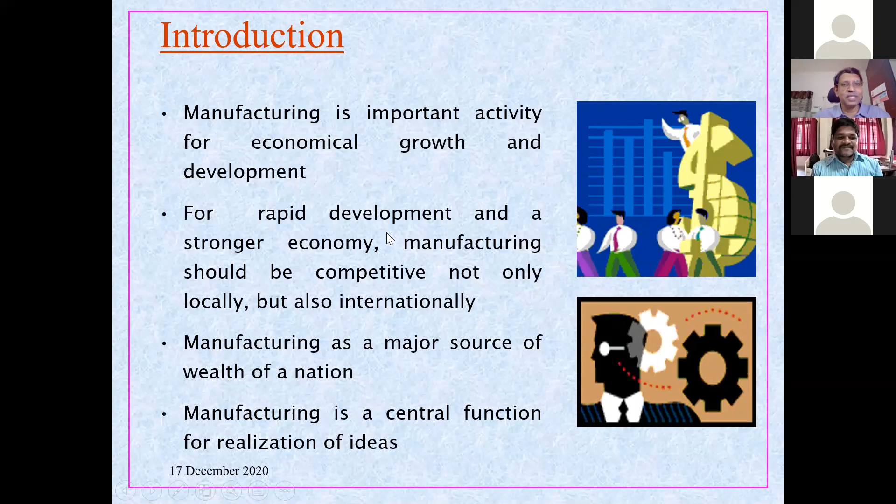First thing we need to understand is manufacturing is a very important activity for the economic growth of any country. These days, manufacturing stands as the backbone for the economy and stability of a country. A few years back it was agriculture and other trades, but now it is basically manufacturing. If any country has advanced manufacturing technologies, we know that it is a developed country. So that is how manufacturing is associated with the development of a country.

If you look at the definition of manufacturing, and if you look at what we are today, both actually don't really match. Manufacturing is a word derived from Latin, a combination of the words manus and factus. Manus means hand, factus means to make. So the meaning of the whole word is manufacturing means making with hand, or made by hand. That was the definition.

But today, if you look at manufacturing, I'm going to show you some videos which will bring to you the practical scenario in industry today, where everything is manufactured without the intervention of human hand or human being. So manufacturing, though it means something, the present scenario is entirely different. We are going to look at what made this kind of transformation, right from just making with hand to the present state of manufacturing that we have.

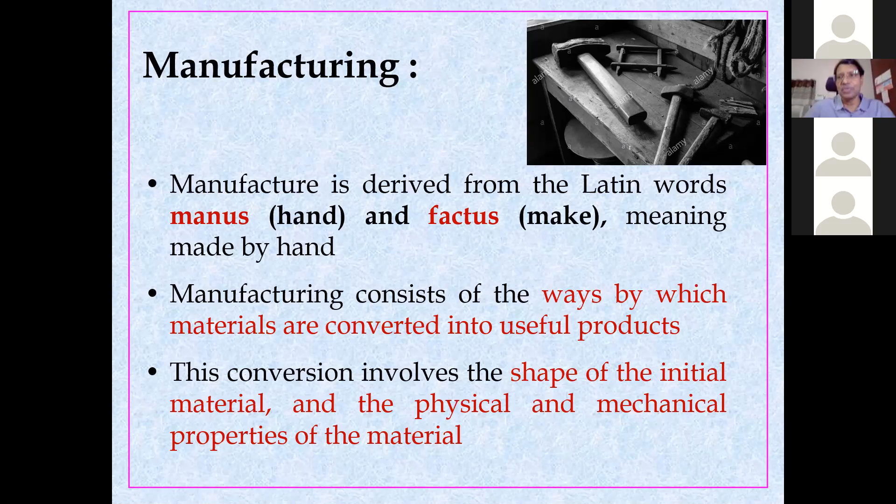As all of you know, manufacturing is a process, a value addition process where it transforms raw material into a useful product, by applying several technologies. That is the definition of manufacturing.

Now, if we go back and look, we may be thinking that we, at our present age, invented manufacturing, but that is not true. Even the Stone Age people had, well, I can't say metal cutting, but at least the idea of a cutting process.

Now I'll ask you a question, please respond quickly. Take a blunt knife and then cut anything, maybe even a fruit, an apple, and cut. And then take a sharp knife and cut. Which will be easier to cut?

I'm looking for a response from the audience. Sharp knife, sir. Yeah, sharp knife, you're right. But why? It's easy. Since the surface is too thin, it can pierce into the object fast. Yeah, how is that, why? What is the technical reason? Can you go a little more into the basics? If we are applying force, the force is concentrated on a small portion, and it is easy to go through the object.

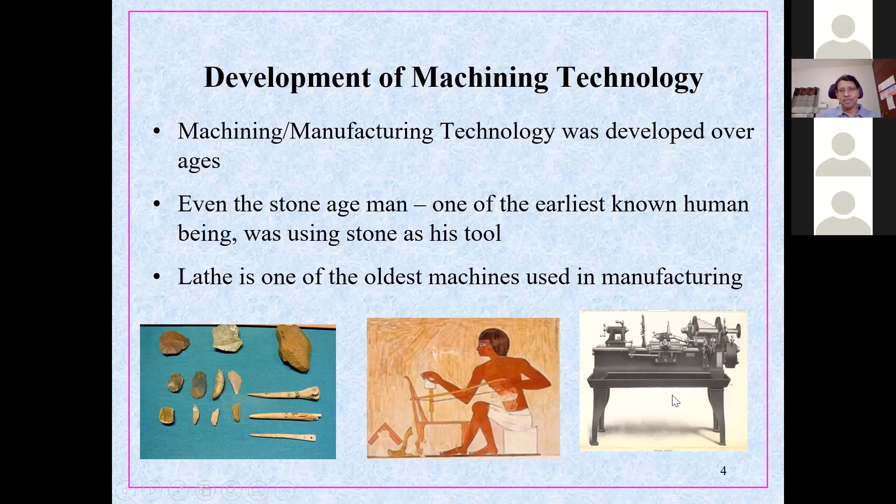If you look at some countries like China and even India and other countries, they had what is called a bow drill, where you put a sharp tool and then rotate it, so you drill through the wood. Then the first lathe which was made was like this.

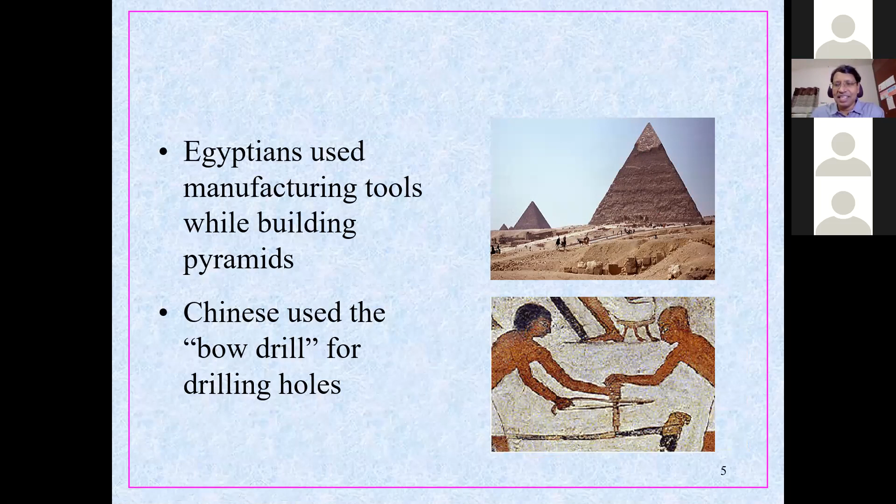Even Egyptians had different types of technologies to cut the stones and then move them up to height. To take the stone to that much height takes a lot of effort, so they had all the technology to do that.

From that period onwards, just give me a second.

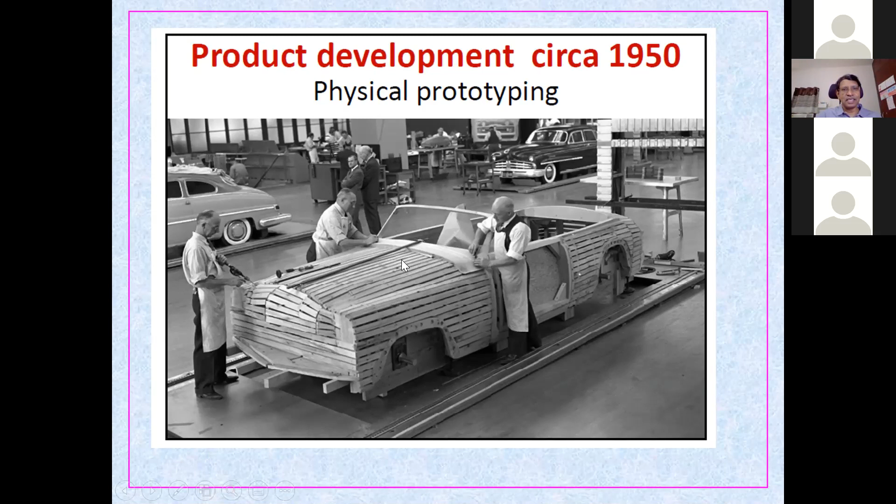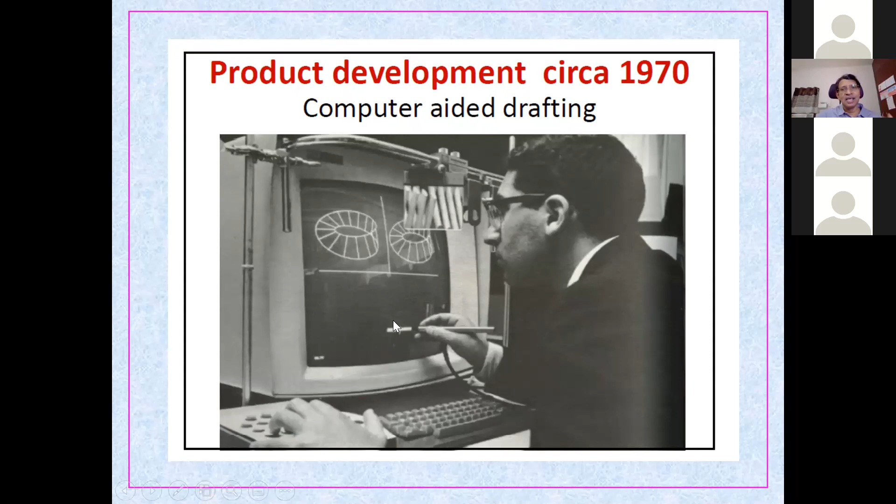Then later in the 1970s, when computers came, they started doing the drawing on the computer rather than on the drawing board, so they transformed. Then they started making models—not just drawings, but models. Initially they were called wireframe models.

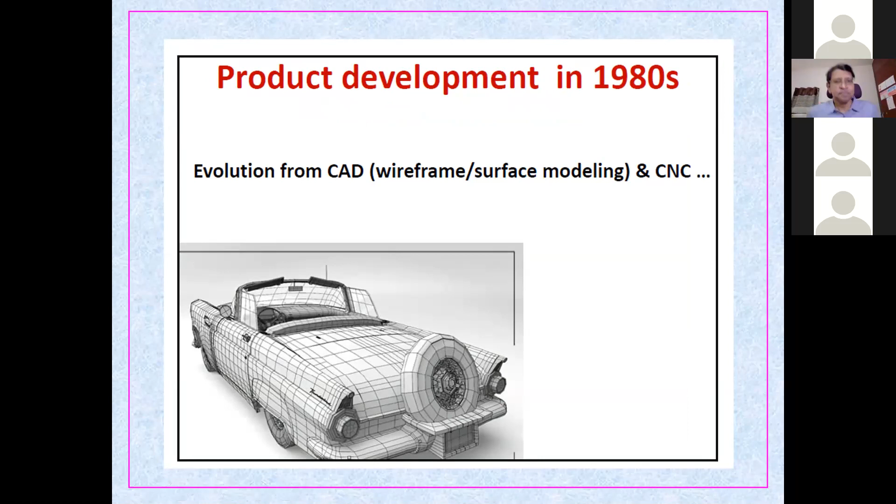Wireframe models do not define the solid properties, but they can give at least the shape of the products or components. So we see the 2D drawings were all like this, but then later we had the technology to make 3D drawings, which are more easy to understand.

When some of you are teaching engineering drawing to first years, you give top view, front view, and side view, and ask them to draw the isometric view or imagine the component or object that has been drawn. They find it so difficult. But if you can give it in 3D, it's more easy to understand.

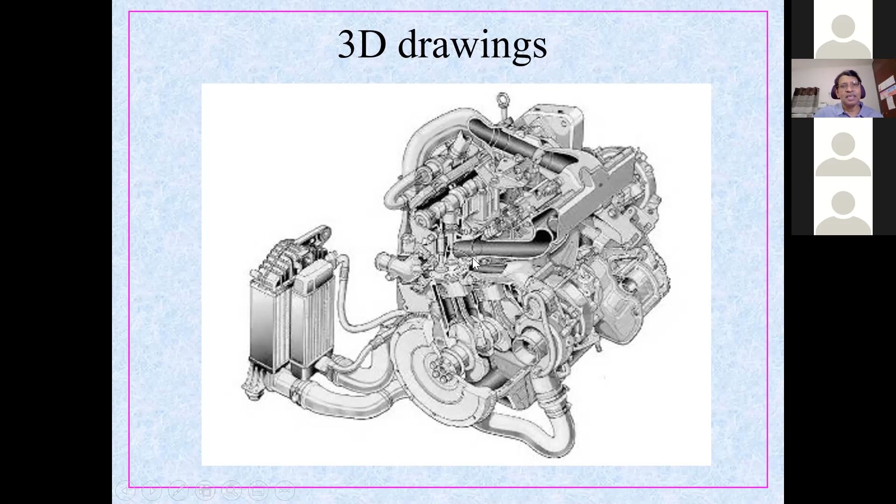There were still problems with realizing it. So then solid models came, which give us the idea almost like a real object—what you see, you can see them on the screen.

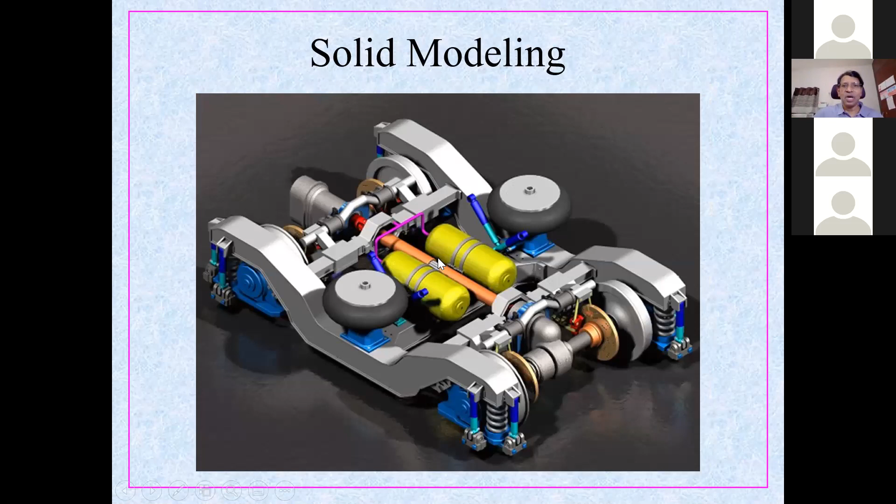Later the analysis came—finite element analysis, finite difference analysis, and also now you have CFD, where we can analyze all the fluids and their flow. It's called computational fluid dynamics. So all these things we can analyze, and thus the analysis part was brought into design.

After design, you analyze it, and then we can know whether it will be able to sustain those forces or not, and then you can go ahead.

On the other side, when you look at the manufacturing side, earlier it was all done manually, and the accuracy and quality of the product depends on the person or operator doing that. So if the operator is in a very good mood and is happy, he will do everything nicely. But in case he's tired or fatigued, he will not be able to carry it out efficiently and the quality gets affected.

But then later, after the 1940s, and importantly after the Second World War, people started looking at manufacturing and addressing all the challenges. It looks like during the Second World War, when American planes wanted to cross the Atlantic Ocean and go to the European side, some of the aircraft crashed.

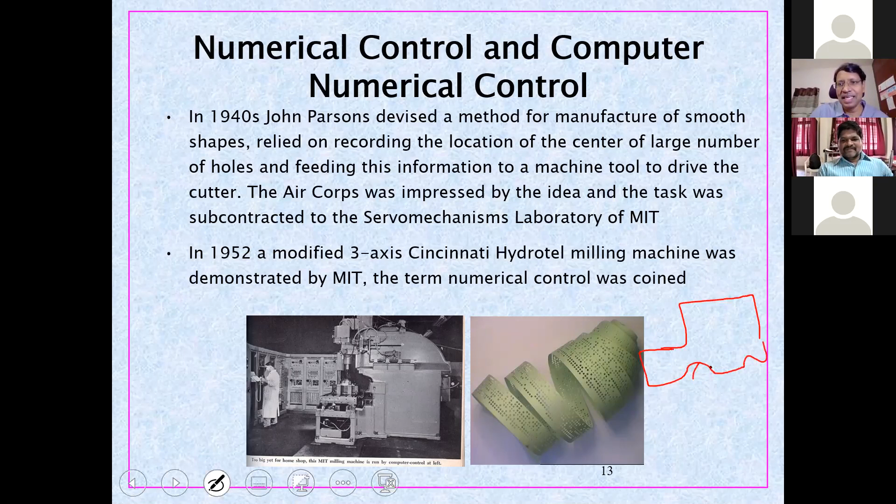So if you look at the old automobile Jeeps, the design will be something like this. Have you seen? So it will be like this. Now when you have the wind, it actually resists. At high speed, wind resistance is the primary resistance, and a lot of fuel is consumed because of that.

So if you want to overcome that, we need to design it using what is called an aerofoil structure, which is a free-form surface. Nowadays, if you look at automobiles, their design is so smooth like this, so even when the air is flowing, it smoothly flows over it, and the resistance is less, if not zero, at least minimized. Here it exactly opposes, and a lot of fuel is consumed.

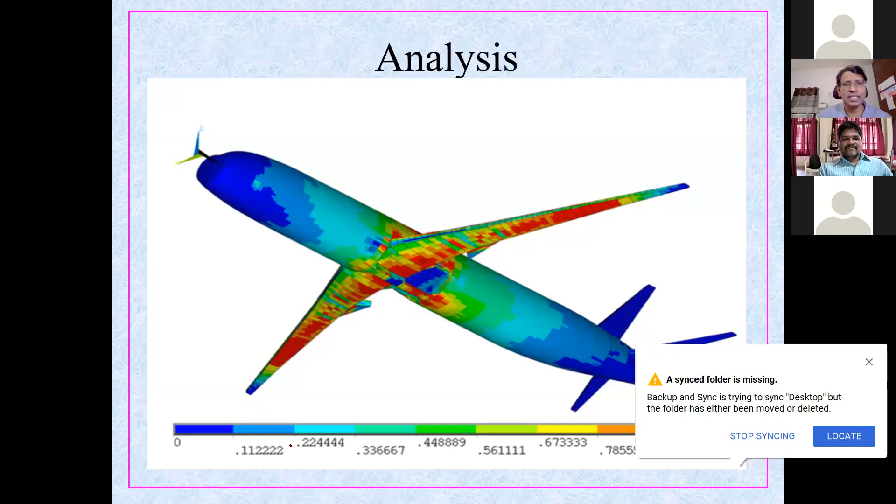Same case with the aircraft, so the design of the body needs to be changed - that is called an aerofoil structure. On the wings and even on the body, the wind smoothly goes like this. Sorry for that, here itself you can see that body structure.

So what I'm trying to tell you is that instead of increasing the fuel when making the design, if you can structurally optimize the design, that's fine, it reduces the weight. And the important thing is to make the shape in such a way that the wind resistance is minimum. So the challenge in engineering drawing is that on one side it's the weight, but on the other side the geometric shape is very, very important, particularly for automobiles and any objects moving at high speed.

So now here the question is very good - the designers had some facilities to make an aerofoil structure. Now, the next question is, how do you manufacture it?

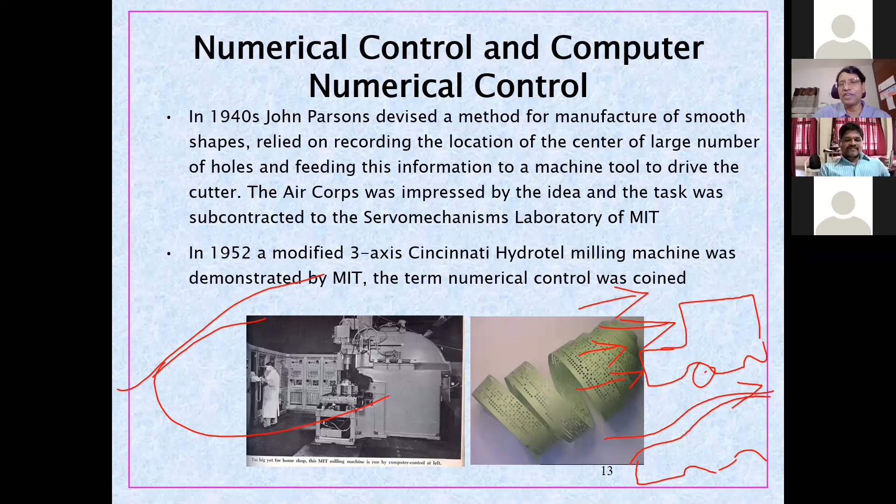See, usually in turning you would have seen, the operator holding the tool and controlling it. And if you look at carts in the villages in Kerala, a lot of them have a wooden cart, and you see a beautiful shape of the legs, isn't it? In the olden days, a man holding the tool would make this kind of shape.

That's good, but now when you want free-form surfaces, you need to control the machine tool in 3 axis, 4 axis, minimum 5 axis. So how do you control it? We have two hands.

If the operator is very skilled, he can control with 2 hands and maybe one leg still, but not more than that. So if you want to maintain the shape, manual control is impossible. They needed to do something more to address this issue. That is how John Parsons from Massachusetts Institute of Technology started thinking and looking at it, and finally in the 1950s they were able to make punched tapes where they put holes and could control the movement of the machine tool.

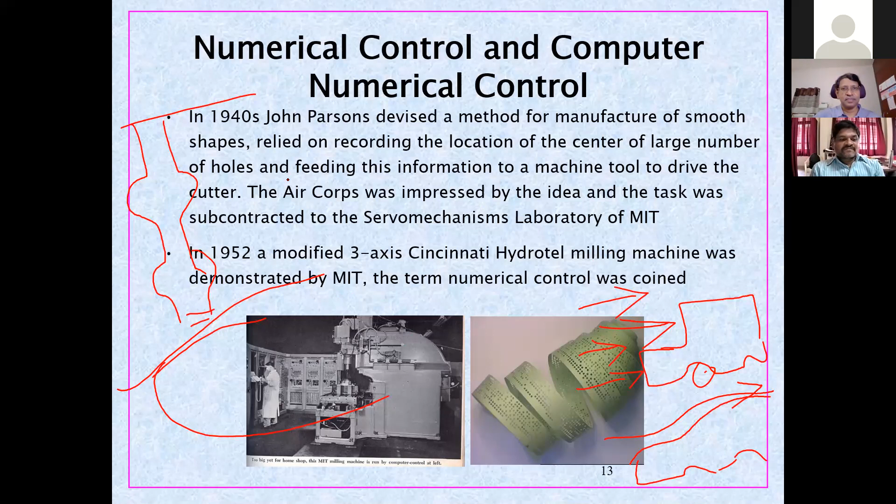So I'll answer and go ahead. It was used in the textile machine to make different designs. They used to manually control the thread. I think even in India, there are still hand looms where they control the design with hand control, but they used the CNC machines. So this is how actually they had the punched cards, on which they'll make the punch and then make the machine read it, interpret it, and then control the machine tool.

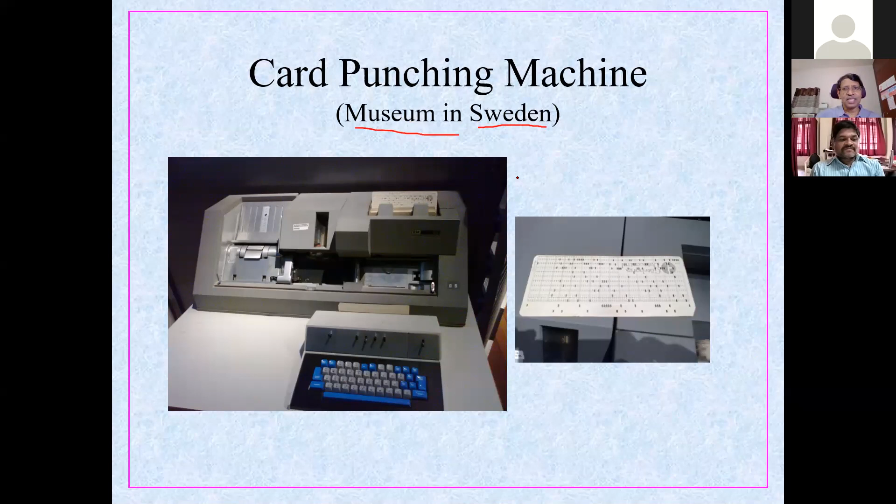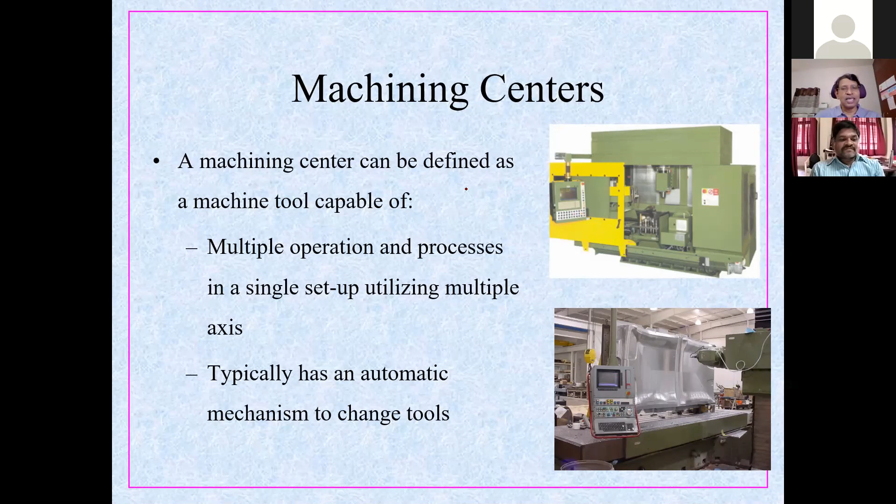I saw it in one of the museums in Sweden. I think nowadays we don't see them, they are almost not there now. So these were the kind of machines. After that, several types of machine tools have been developed, with axis controls, even up to 21 axis and more that they can control. Axis is nothing but the freedom for the tool to move, in one direction, two directions, three directions, or tilt, rotation about its own axis and all these things. So the degrees of freedom for the tool are called the axis. So 5, 6, 8 and even 21, that is the order.

Now we have the freedom to control the tools, and the way components were manufactured in the old days versus now, what you can see is they have such a good surface finish that it looks something like a mirror finish. I wanted to ask you a question here, but to avoid delays, let me go ahead.

So my question is, how do we get the surface to be like a mirror finish? What do we need to do? If you can answer quickly, you can do so. Otherwise, I leave the question to you to find out the answer. Anybody will volunteer to answer it? How do we get the mirror kind of finish on a metal? What do we need to do?

Polishing, grinding. Yeah, that's very good, so we need to polish and grind. Nowadays, we have what is called diamond turning, where they make mirrors on metals which are used in space applications. When they send mirrors into space, ordinary mirrors like what we use in our house won't work. If you put them in the sun, after 2 days the coating will peel off and you cannot use them, because the temperatures in outer space will be very, very high.

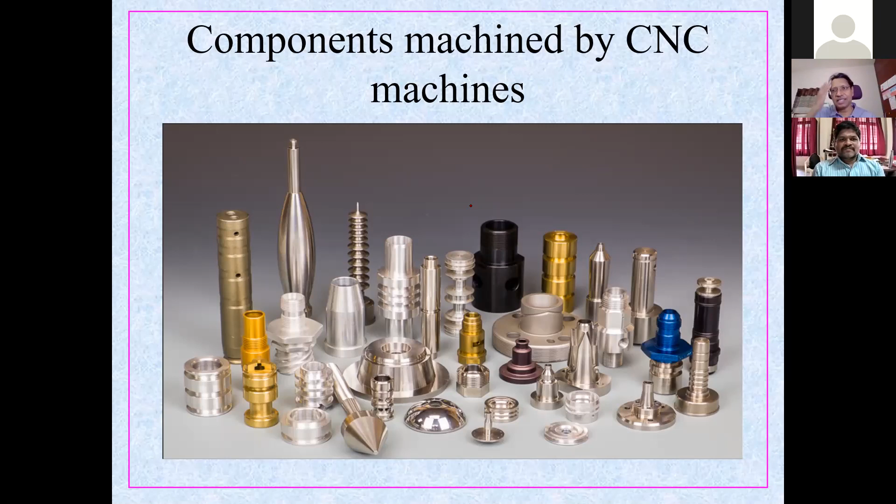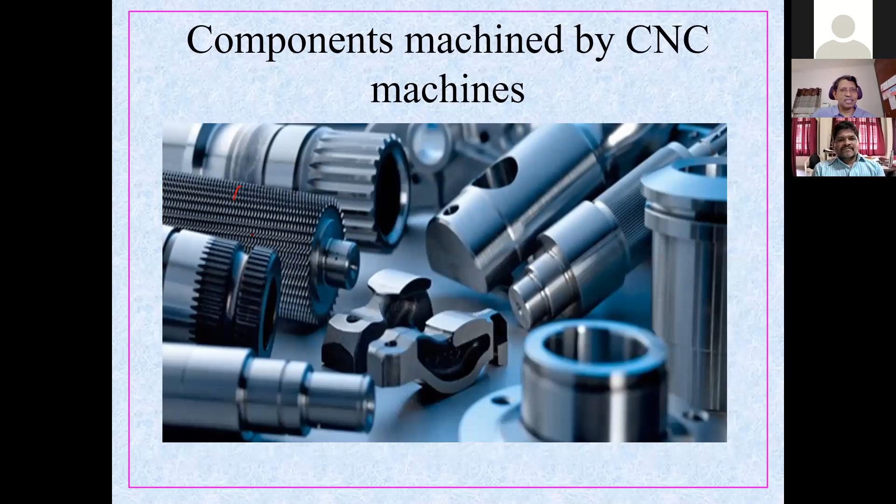Diamond tools are used, and the basic problem is vibration. If there is any vibration in the machine tool, the diamond, which is very hard but brittle, will break. So manufacturing these kinds of components is not easy. It is a big challenge, but we are able to overcome that, and we have achieved some of these levels of manufacturing. We can also see complicated shapes. You can see this one; such things are possible to manufacture nowadays.

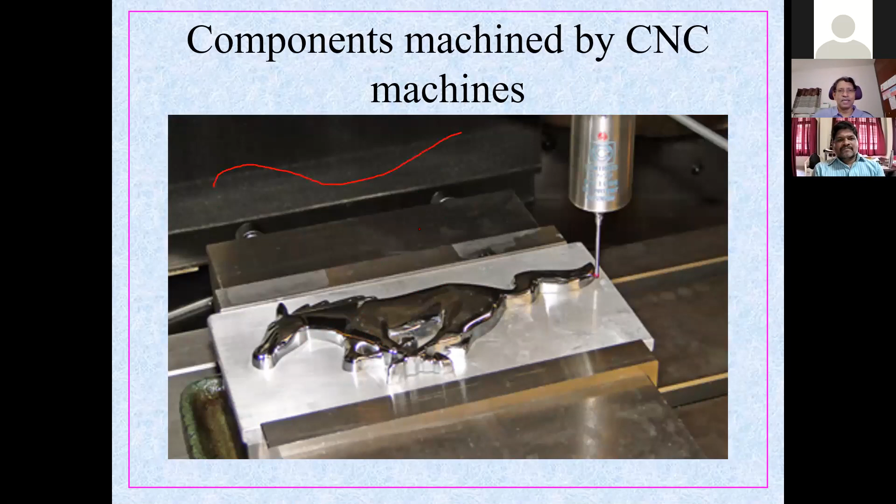And also free form surfaces. To make these free forms, it is very difficult to control the axes. We need to simultaneously control them to get smooth curves. These are called free form curves, and these kinds of shapes are called free form shapes. It is a big challenge.

You can also see some components, the size and the complexity of the geometry and the intricate shapes. This is one such example, used in high precision machining of beryllium and titanium. These are hard to machine or difficult to machine materials, but you can see the shapes we are able to machine.

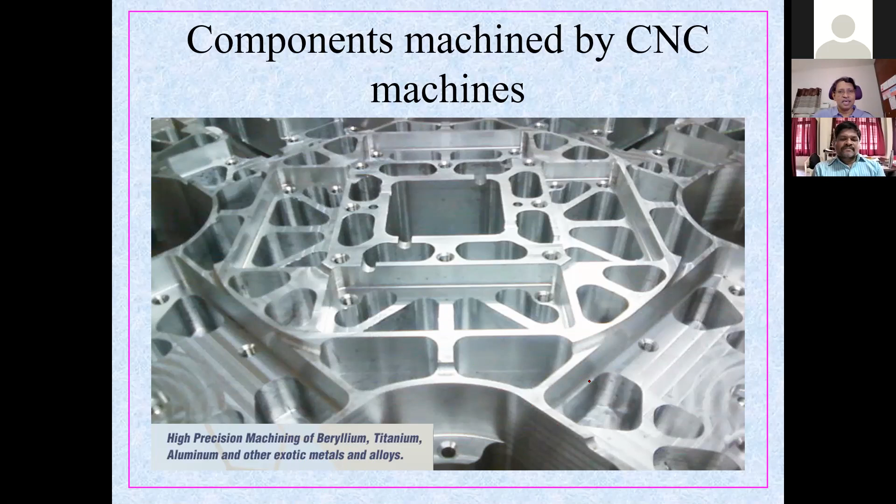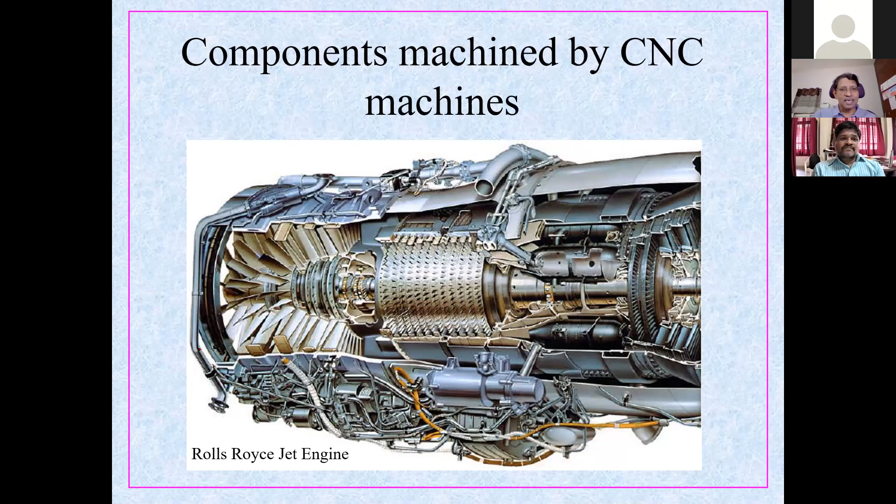And if you look at some components, every time we hear about aircraft and travel these days, if you look at the engine, it is such a complicated design and manufacturing. Even today this is a big challenge, and much research is going on where the reliability expected is 99.999%. It's a complicated system, but we are able to realize them. It's all because we have CNC technology.

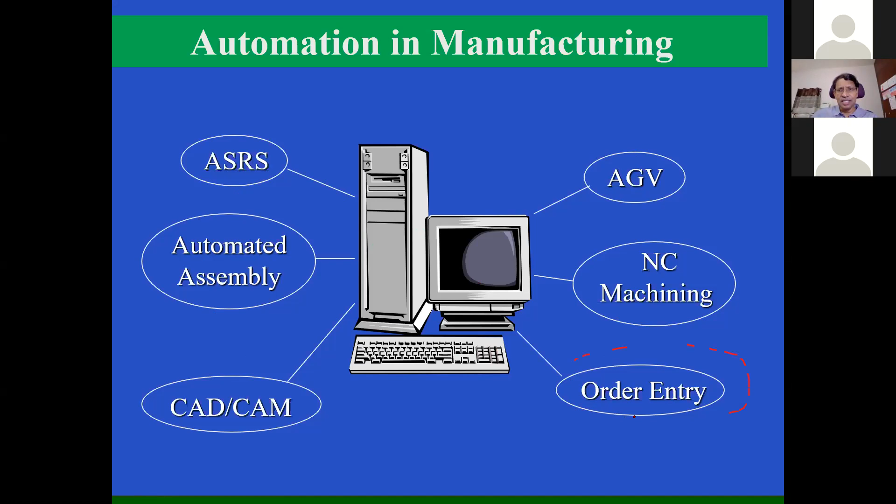So from machining, we moved on to use automation. It's not only in machining. If you look at an industry, there are material handling systems, packaging systems, control systems and so on, and computers were used in each of them. ASRS is automated storage and retrieval system, a material handling system. AGV is automated guided vehicles. So in assembly, material transport, machining, CAD, and even managing customer relations and dispatch, computers are being used everywhere.

And then the other development is robots. Let me ask a question here. What is the meaning of the word robot, or where was it derived from? Does anybody know? I'm looking at the responses from the participants. If you don't know, you can at least say you don't know.

Okay, Muhammad Abdul Kader. Niranjanan. "I don't know, sir." Yeah, that's good. At least you answer. You're all teachers, so I don't know whether you interact or not. Maybe I am not a good teacher, so I am interacting with you and putting you all in trouble. Even students these days just want to sit and listen, but that's not a good method of teaching. Interactive teaching is more effective, as education researchers say. So I like to interact. You have all escaped, because in a classroom I would have asked you personally, but now you can hide behind the screens. Okay, fine.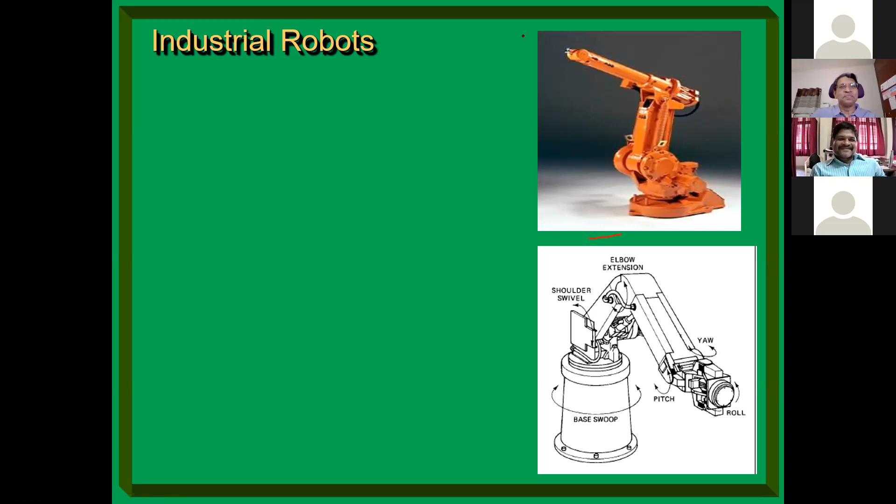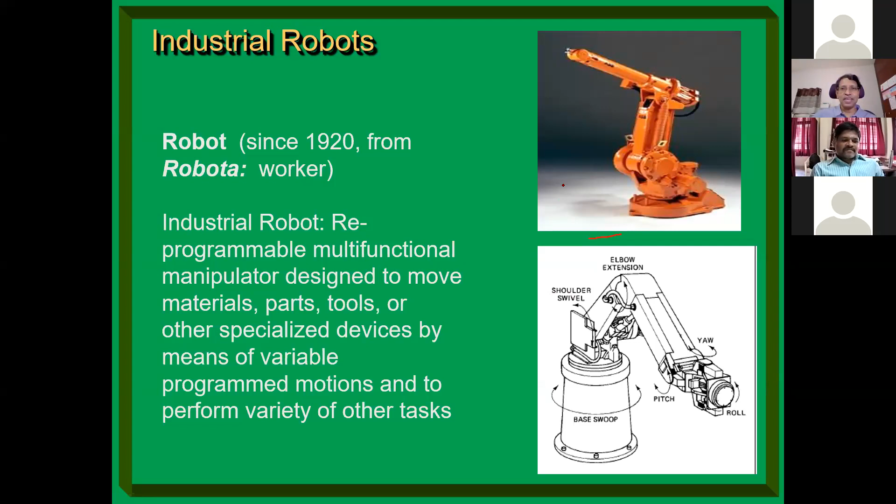Going ahead, the word robot is actually a Czech word, from Czechoslovakia, and it means a worker or a servant. It was initially used in a novel, like a fictional character, but a few years later it became reality, and now we see a lot of robots used in manufacturing, and the way manufacturing is done has been transformed because of robots.

Then in the next stage, people started looking at what is called simulation. I am again tempted to ask you the question: what is simulation?

So you might have heard these terms, modeling and simulation. So they're all important for mechanical engineers. Yeah, somebody answering, please go ahead. Sir, is it we are imitating a situation or a process? Yeah, that is right.

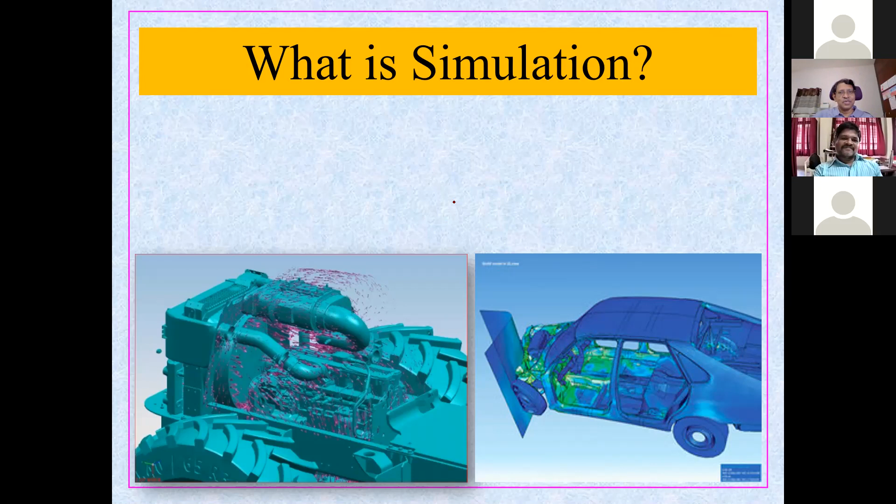So a little more technically, it is nothing but making a model of a particular system, and then you apply the forces and see how it actually responds to the given input. So that is called the system behavior. Studying the system behavior is called simulation. So for that, obviously, we need a model.

So usually there'll be a model of the system. We have inputs, how it reacts to that, and then we get the output. If this is done on the computer system, that is called simulation. So simulation is a manipulation of a model, simple or complicated, to understand the phenomena, their significance, relations, and interactions in the real system. So we do that on the computer.

So one of the examples you can see here is called a crash test, which is one of the important criteria before they get permission to mass manufacture any automobile design. And this used to be a very time consuming and costly process, because a crash test means you need to physically make an automobile, make it crash against something, and then study the damage which is caused.

And usually they put a dummy here, like a human being, and then assess the damage or injury caused to that person, whether sitting in the driver's seat, at the back, or beside the driver. All these things need to be studied. So that used to be a very costly and time consuming process. If the design is not good, they need to modify the design, manufacture another model, again crash it, and do that again. It's very costly and time consuming.

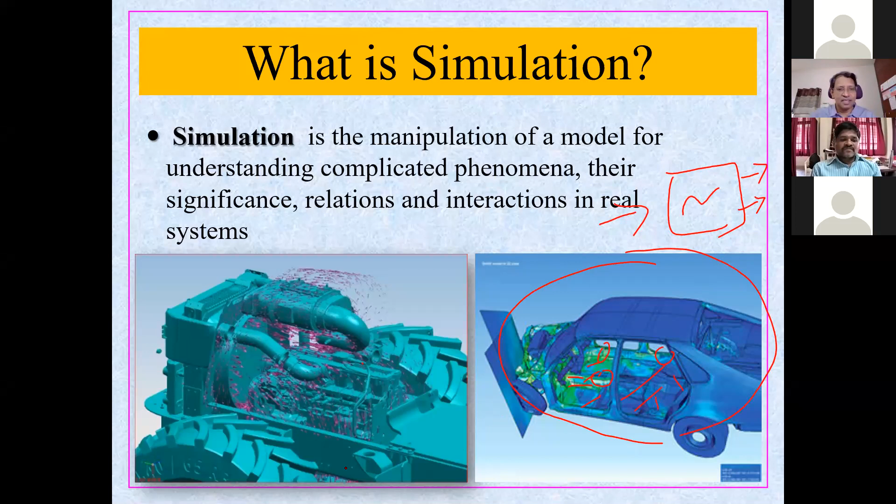But nowadays we have the facility to carry out this crash right on the system, through modeling and simulation. We can see the stresses and the damage caused on this system. And finally, when we are satisfied, we can make a car, test it physically to get the certification, and go ahead with manufacturing. Thus it has saved a lot of time and cost. Otherwise, each new car model used to take a lot of time. But nowadays, every fortnight one new design comes. That is all possible because of simulation.

And then there is something called virtual reality. Okay, I don't want to ask the question, let me keep going. Virtual reality is not quite the right term, because virtual means which is not there, and reality means actually there. So what is not there, you are making it be there. That is called virtual reality.

These days, even in manufacturing, you can do the assembly virtually. You don't have to have an instrument, the sub-assemblies, or the components, but still we can train the person to make the assemblies in the virtual world. It's also being used in the training of pilots.

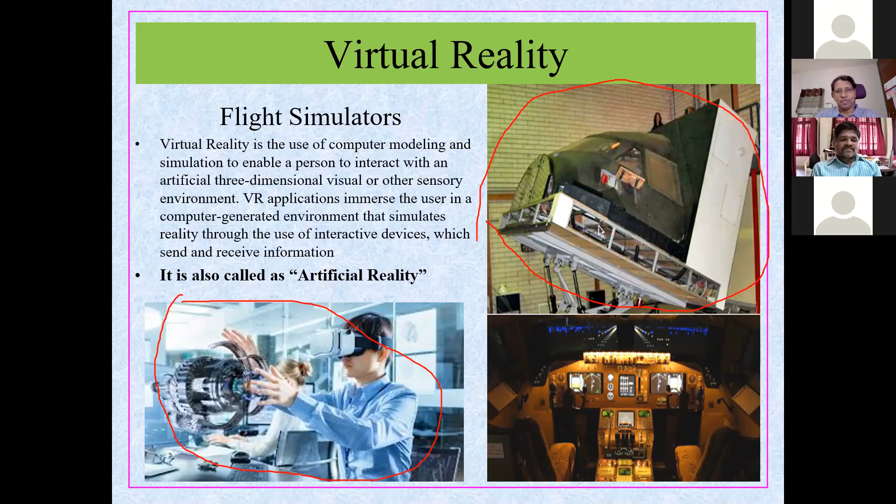We have simulators, where they create an environment similar to the real cockpit of the flight. If the flight is taken up very steeply, he can actually feel that force and the discomfort. Thus he knows what is really going to happen and how the passengers will feel, so he can control it and get the training. These can all be done using virtual reality, and the same principles can be applied to manufacturing. Nowadays we have what is called virtual manufacturing, wherein the factory is virtual, right on the computer.

So the components are also virtual and we can make all of them right on the computer. You may ask, what is the use? You don't get the physical products. So what is the use of manufacturing the components? But you can study all their characteristics. You can inspect them and we can actually know the quality of it even before manufacturing.

You may ask one more question. So even in CAD drawing, I'm making something like a cylinder if I want. So I'm designing like this, but then I have another component which has been virtually manufactured. So this is also like this. So what is the difference? You know what is the difference? On this CAD, if you want to measure the surface finish, you cannot do that.

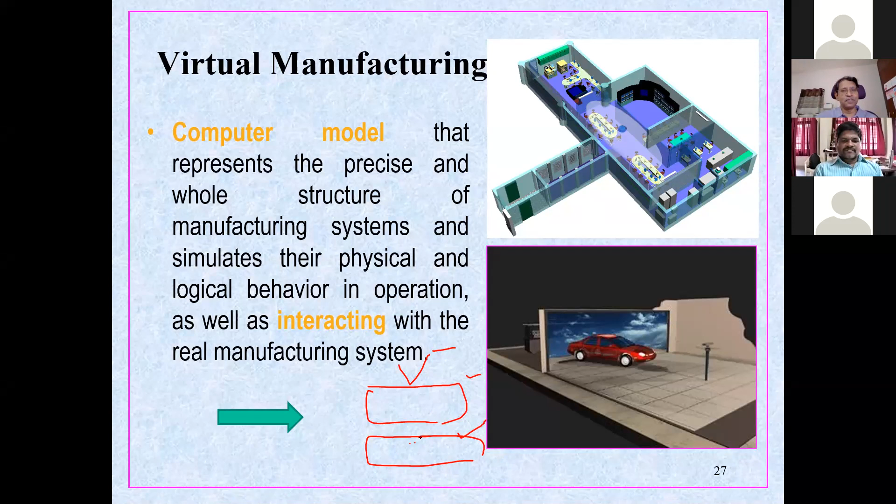But on this virtually manufactured component, you can measure what is the surface finish, what is the actual dimension which has been achieved. So in the design, we only assign the tolerances, but in the virtually manufactured component, you can actually know what is the size of the component. So thus, virtual manufacturing is a predecessor for actual manufacturing, which saves a lot of time, a lot of efforts and cost.

So thus, virtual reality is very much required in these days, where the slogan is do it right for the first time. So it is not trial and error. It's not after making components you say, okay, this is the right method, I'll go ahead. No, everything else you do on the computer any number of times, n times. But finally, when you do it, you have to do it right in the first attempt.

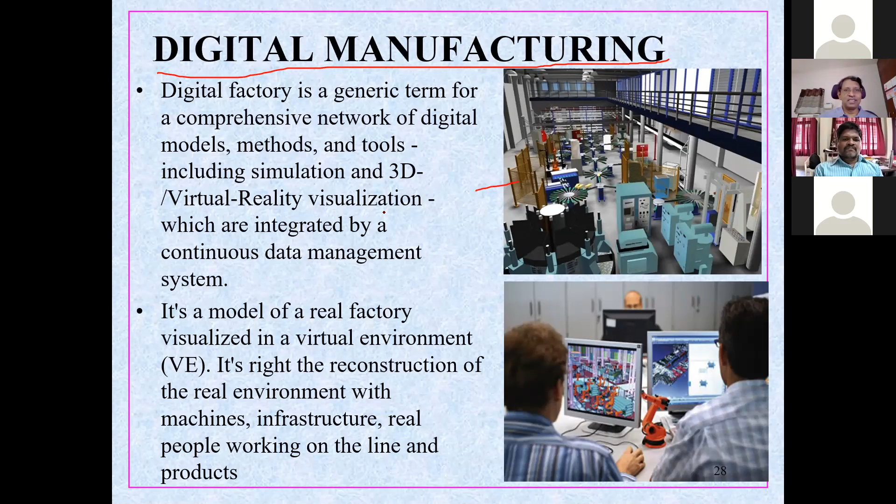So then we have what is called the digital manufacturing. Similar to virtual manufacturing, where everything is done right on the computer. So even if you have an actual factory, there'll be a digital factory of it, and you can see the production, what is going on in the real factory, on your desktop digitally. So these are all the digital manufacturing. So that's virtual reality, 3D environment. All these things play an important role in it.

Okay, now I think I need to ask this question. For all these developments in manufacturing, what is that invention that contributed most to this machining field? Yeah, you need to answer this. What is that one invention that helped to bring manufacturing from that state where it was made with hand, to this kind of fully digital, virtual, fully automated manufacturing? Automation, sir. Automation, okay. Anything more?

Yeah, Hridish, Sridharan. You all might be professors, but I don't see the designation here. Jubil, Zia Joy. So I'm calling you with your names. If you're faculty, sorry for that. I don't know. Linto Jose. Yeah. Any other answers?

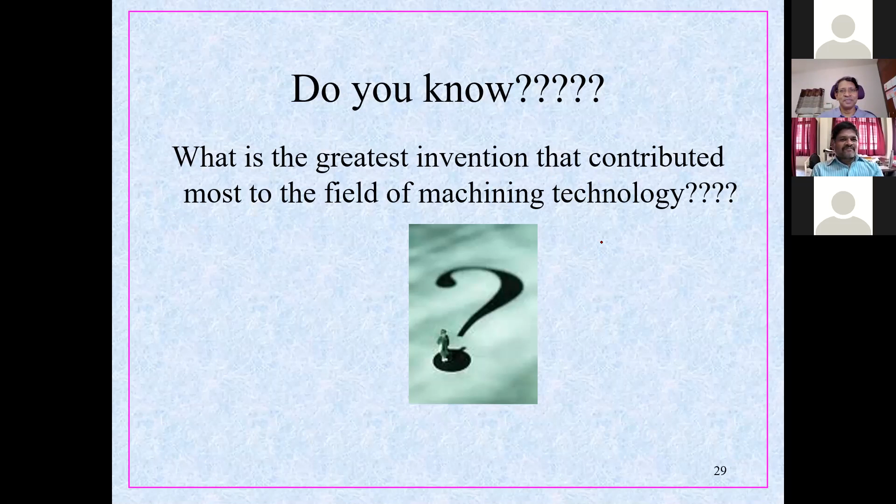And the power consumed for one single computer looks like 160 kilowatts. That means you can almost power a town. And the weight of one computer is 30 tons. So you can't carry it. That was the way the computer was. But computer technology has developed and is now very powerful, small in size, less in weight, and portable. That has contributed a lot to our mechanical engineering, and to what we now call modern manufacturing. It's all because of that.

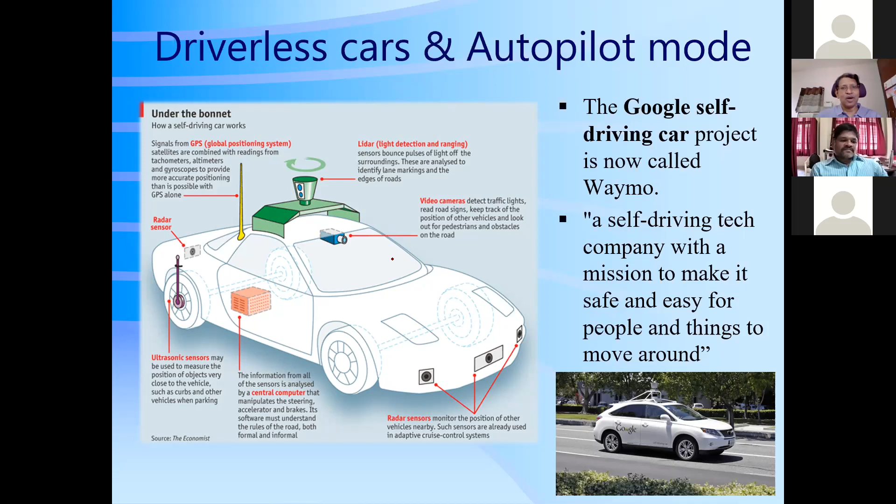So the tasks which are done by human beings, right from simple object recognition to complicated works like driving on city roads, are being done automatically with the help of artificial intelligence. Even Tesla and others have tested this. Though there were challenges and a few accidents, and after that some drawbacks, they stopped it and then restarted. So all these challenges will always be there, but people have been going ahead with this kind of intelligence.

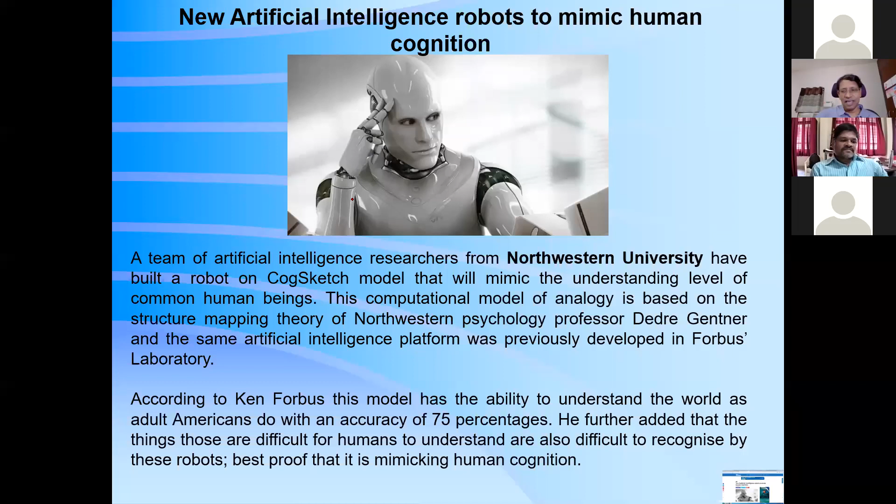Nowadays we have artificial intelligence systems. We can almost interact and act like human beings. And not only in industry, but even in logistics, people started using artificial intelligence.

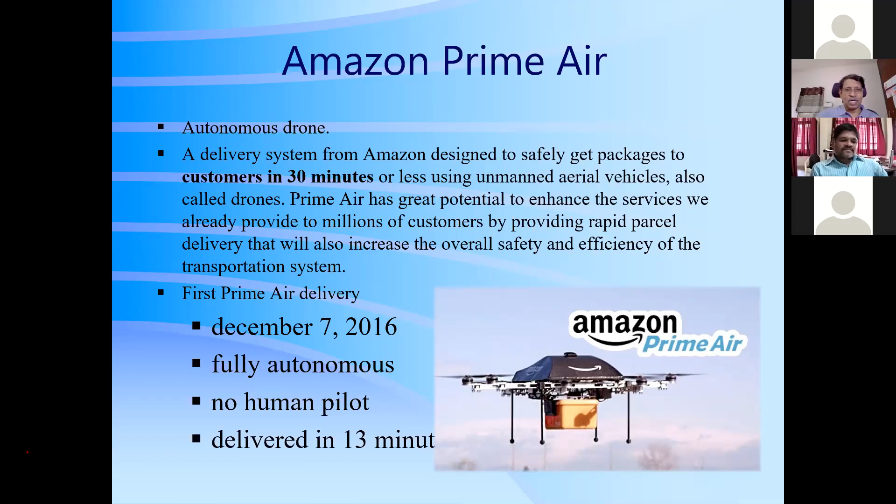So to even deliver products, maybe even in a remote place or a flooded area or a difficult to reach or environmentally hazardous kind of place, we can use autonomous vehicles, drones as we call them, and we can deliver the components. So both in industrial environment and even in general environment, we can use them.

Thus artificial intelligence has been used in almost every area, right from automobile, gaming, healthcare, business, finance, government, and also in manufacturing, in which we are interested today. So now where has this been used in industry? In every area wherever we have the intelligence of human beings to be used, in those places AI has been used.

Wherever there are repetitive jobs which need to be done, there we can use robots. Thus pick and place robots were one of the first which have been used in industry, which are very repetitive and tedious kinds of jobs. That has been done nowadays by robots.

Wherever progressive learning is required, nowadays with the help of neural networks, we can make artificial intelligence systems learn on experience. So AI in all these areas we are able to use it. Why do we need this application of AI? Because there are areas where with pure human effort, it is very difficult to handle.